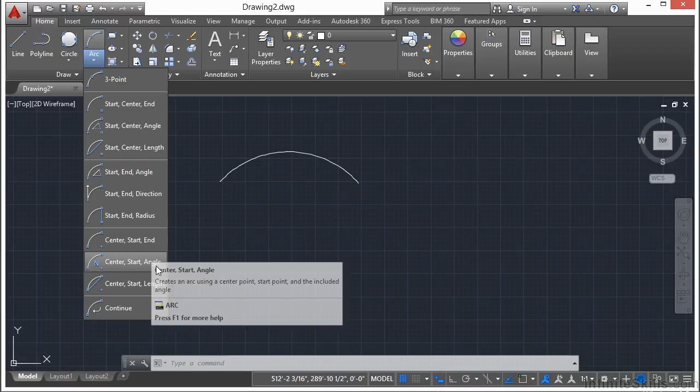You have start-center-end, start-center-angle, start-center-length, start-end-angle, start-end-direction, start-end-radius, center-start-end, center-start-angle, center-start-length, and the continue option. I'll make sure to show you the continue option.

Now, I'm not going to go into great lengthy detail on all of these, because once you get the idea on how some of these work, the rest of them kind of make a lot of sense to you.

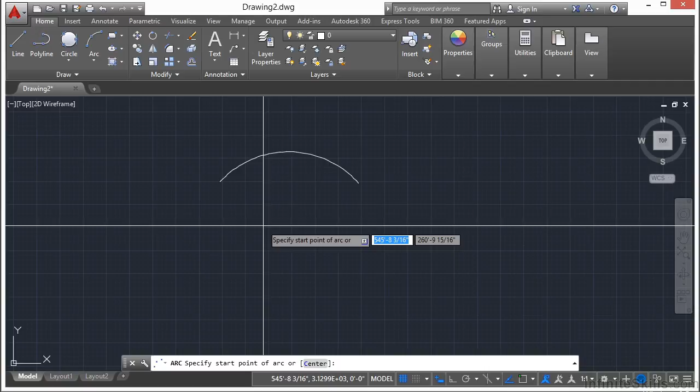So when we started the regular arc command, you should have noticed there was an option called center. This will make your first point the center of the arc. Let me show you the example here.

If I click that, I pick my first point here - that's the center of the arc. Now when I pick my next point, I can continue on drawing your arc. So it's kind of like drawing a circle, and then you type in sort of the radius or a start point, and then you just fill in the rest of it.

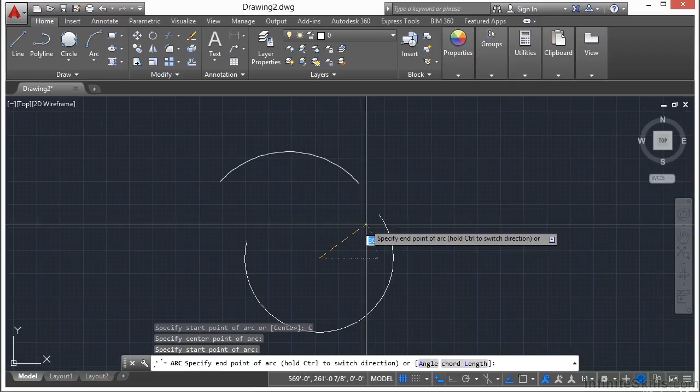You can do that. Well, let's open up a file I've preset called Arc Examples. Click Open. Now here we have in this file a lot of different lines set up for us so that we can try some of these things out.

So if we come here, we have this little bracket that's started. Let's pick the arc command, and I want to go to start-center-end, or start-center-angle, or start-center-length. These are all kind of similar in that you pick your first start point, then you pick the center point, and then how you define where you end up is a little bit different depending on your option.

So let's go with start, center, end. I'm going to start right here. I'm going to type in END for my end OSNAP, to make sure I'm right where I want to be. So that's my start point.

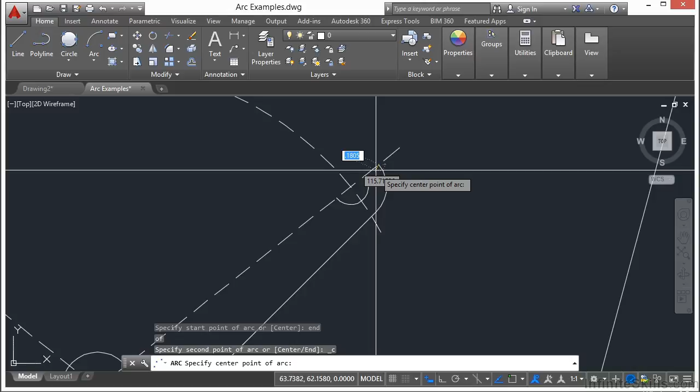Now I need the center. You can see this is an arc right here, so I'm going to type in CEN for center. This is an OSNAP to take you to the center of an arc or a circle. When I move over this arc part, you can see the center, which is right here, gives me a little round glyph. That's for the center point.

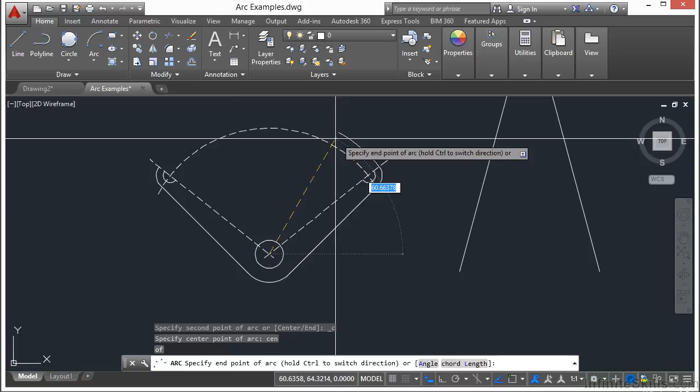So now I'm picking that center, and now I'm drawing my arc, and this is the end part. I'm just going to type in END for my OSNAP and end.

So I was able to draw that arc right there. Pretty handy - I wouldn't be able to do that with the regular arc command. I'd have to draw one point, and then my midpoint, which I'd have no idea where that was. As you can see, it doesn't really line up very well.

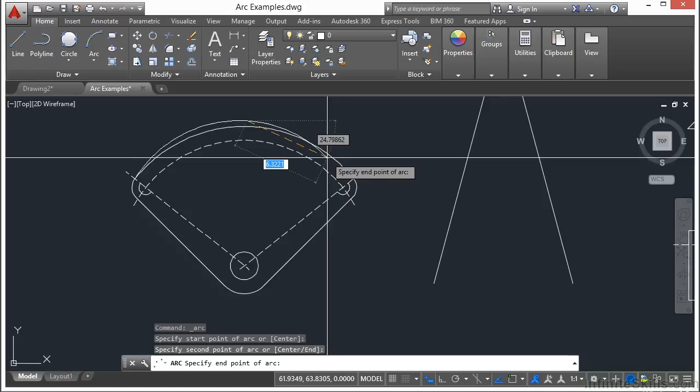So that's these options right here. You pick your start point, you pick your center point. If you know where it's going to end, you can put that in there. If you know what angle it spans, so you can see what angle this is, if you know what that is, you can type that in. Or if you know how long you want that arc length to be, you can type in that option as well. So those are your first sets of options.

Now your second one is a start and an end, and then your angle, direction, or radius.

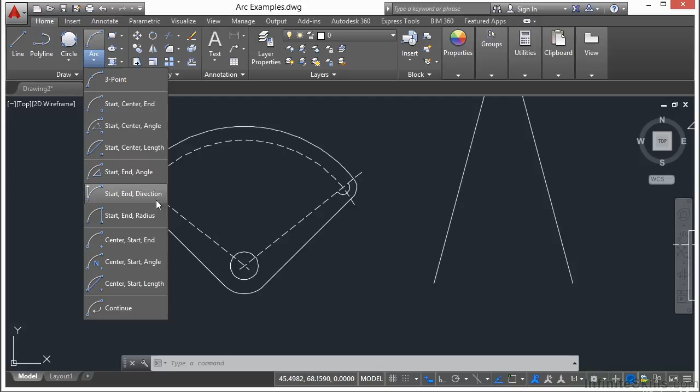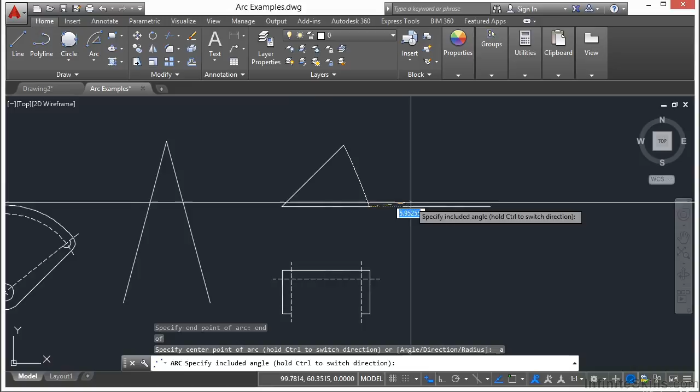Let's pick one of these methods: start, end, and angle. I'm going to pick my first start point, type in END again. I'll start here, and end up here. Then I type in an angle. As you can see as I reposition, coming straight out to the right gives me an angle of 0.

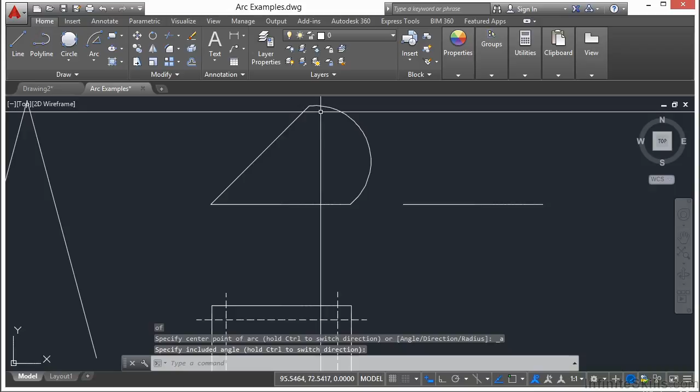But as I move up, my angle increases, making the radius more ice cream cone shaped. So if I know what that angle needs to be, I can just type that in, or I can just pick a point, and it makes a nice little pie shape.

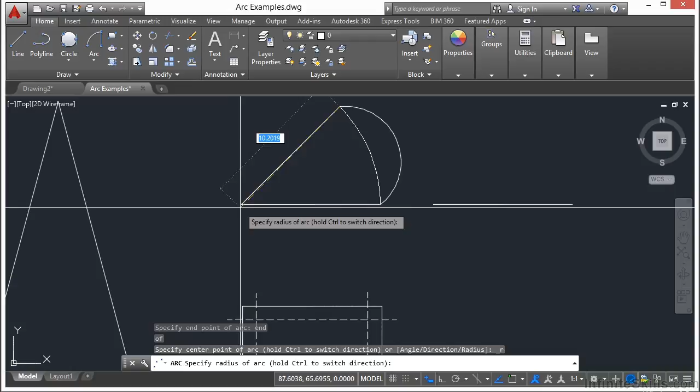I can also go start, end, radius. So if I know what the radius is, I can go start, end, and then my radius. So if I know what that distance needs to be, what the radius is of my circle, I can type that in. If I erase this arc here, and look at this line, I see what my length is, it's 10.

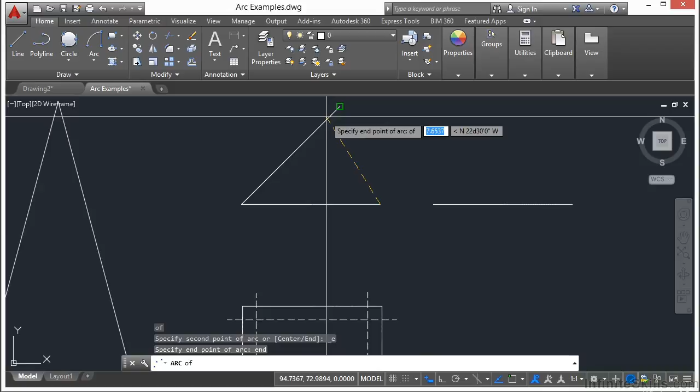Let's assume that this is going to be the center point of my arc. I choose my start, end, radius option. Type in END, pick this point, and then I type in a value of 10 units. This draws a circle and makes a perfect pie shape for my arc. And that works fantastically.

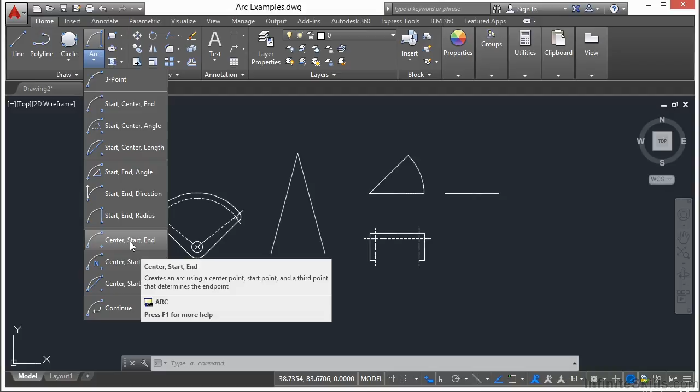Now this last section gives you the center point, the start point, and an end point, or an angle or a length. So let's look at center, start, and end. First I want to pick my center point, right here, using my end snap. My next is my start point. Type in END, pick here.

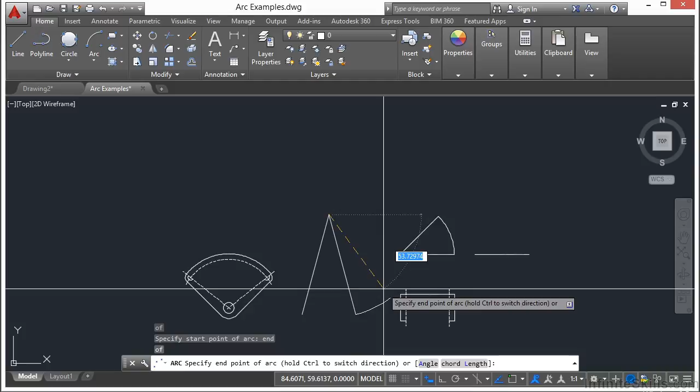Now there's one thing to keep in mind with arcs: when you start an arc, regardless of how you start it, it is always drawn in a counterclockwise direction. So if I do this, it will draw a very large upside down Pac-Man looking shape. But if I want my arc to come through this middle part, I have to hold down the control key, which switches my direction, and I can just draw it again. So if I type in END, then hold down control, move over here, it'll snap to that point right there.

So which one of these arc methods do you use? Well, it depends on what information you have and what you want to draw. How do you know that? You just have to look at it. You have to see, like in this case here, we knew the center point, we knew the end point, and we knew the start point.

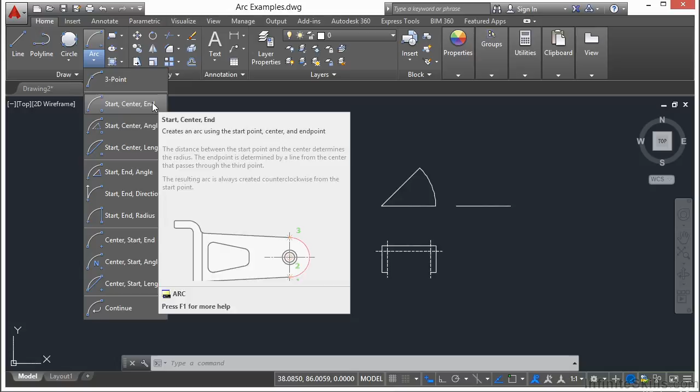So we were able to use that option. Here, with this method, we used these first options. We knew the start point, we knew a center point, and we knew an end point. So a lot of these are the same thing, start, center, end, just in different orders. You have start, end, angle, direction, or radius. So it also depends on what you have and what order in which you can get to that information. It's just a matter of trying it out and getting used to it.

Now that continue method I wanted to talk to you about is a nice little thing. If you draw an arc and then want to continue that arc, meaning not lengthening the arc but drawing another arc that starts from that same point, click the continue option. This will draw another arc that's tangent to the last one you drew. It'll only draw one and then the command ends.

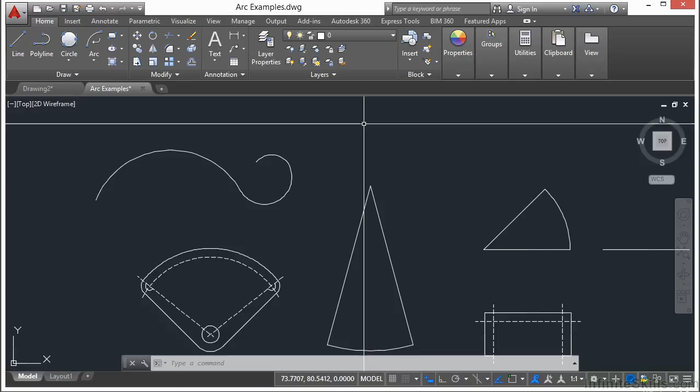Now you can't press enter to restart it - that'll just restart your arc command, but it will not be continuous. So you have to go back here manually, click the continue button, and keep drawing it that way. It's just a nice little thing that will draw an arc tangent to the last arc you drew, but it's a little cumbersome to use, though it is there and available.

So as you can see, there are a lot of different ways to draw arcs, and you need to use the method that's best for your specific situation based on what it is you want to achieve and what information you already have.